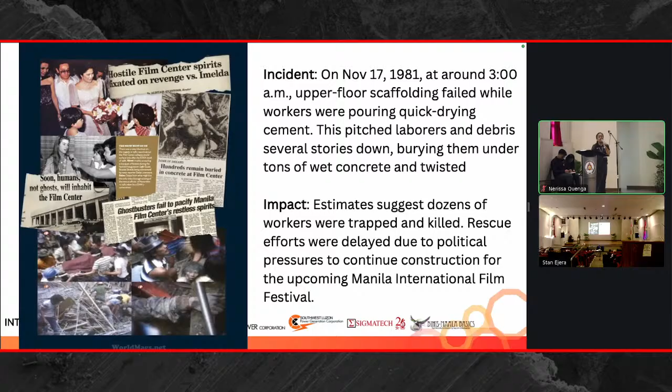The oldest one I have shown here is way back in 1981, and it's happening also in the very place where we are supposed to nurture experts of engineering. So what's the problem? You can see also in the previous slides that the impact of failure of engineered systems and products has an effect in various areas.

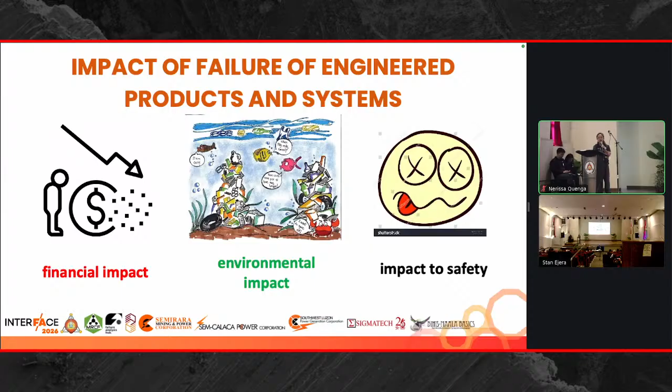Impact to financial losses, impact to environment, and impact to safety. All this should be reason enough for us now to look at this more closely, investigate, ask why, and how we can stop all of this.

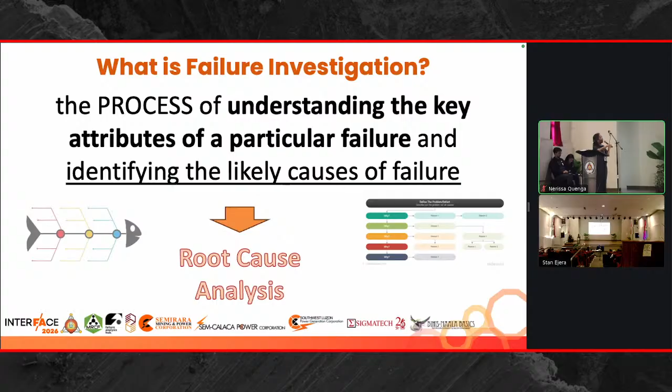Failure investigation is something that has been offered in the department for some years, and we define failure investigation in our courses, in the way we teach our students, as follows: failure investigation is a process of understanding the key attributes of a particular failure and then identifying the likely causes of that failure so those causes can be used to do root cause analysis.

From the root cause analysis, we can move forward to doing failure reporting, analysis, and corrective action system, or FRACAS. Essentially, FRACAS is a cyclic loop that will help us prevent recurrence of failure. FRACAS has seven steps: failure occurrence, failure reporting, failure analysis, root cause identification, corrective action implementation. When one corrective action does not become effective, you go back to reporting or failure analysis, doing root cause analysis, and addressing another root cause that might have been determined, to see if it has been effective. So there's verification of effectiveness, monitoring and tracking. All this cycle gives us a system for preventing recurrence of failure, or better, a cycle for continuous quality improvement of our engineering products, systems, and services.

If we had applied this from 1981 probably, the problems we are experiencing right now might not have existed at all. So that makes us ask, why has this not been applied? Maybe the answer is because many of our engineering disciplines are not yet integrating this into our curriculum or into our ways of teaching students.

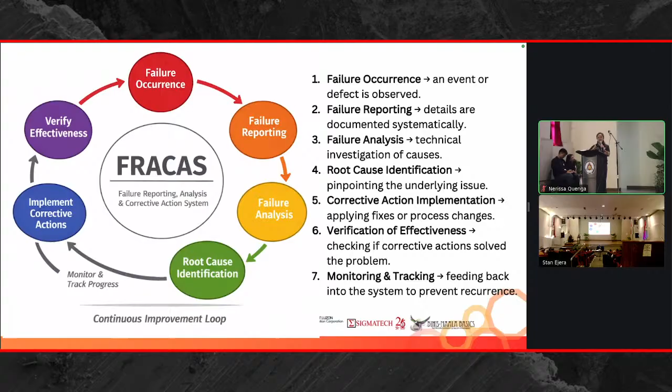So let me proceed. Failure investigation using the FRACAS system has different outputs and different objectives. From an end user perspective, failure investigation can be used to assign responsibility.

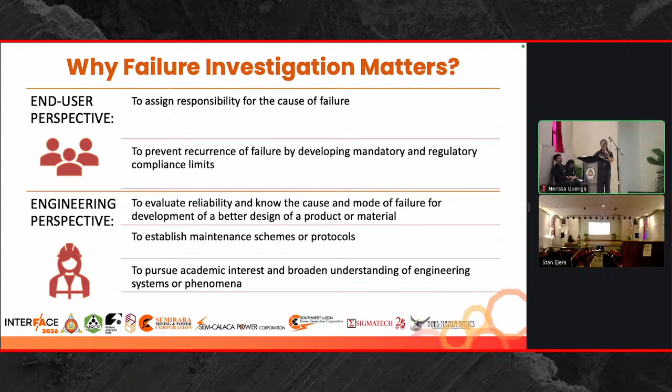Further, from the academic perspective, this failure investigation helps us broaden understanding of engineering systems, procedures, and phenomena and mechanisms of failure that will help us develop new ways of doing things through research and innovation that we do with our students at different levels of academic layers. So whether it is for the public or for the engineering industry, there's a lot of reason why failure investigation needs to be done.

Moving on, in failure investigation, there will be a lot of success when root cause is identified. If you remember the FRACAS loop earlier, there's an important key there, or important element of identifying the root cause. The root cause brings us the corrective action, and the corrective action, of course, prevents recurrence of failure. Now, root cause here means it is the underlying cause. It should be reasonably identified, meaning it can be seen and pinpointed.

And then that pinpointed event, activity, or step can be controlled and fixed. It can now help prevent the recurrence of the failure. If this cannot be controlled, that is not yet the root cause. We need to dig further.

I always tell my students, if we only look at materials, we show the mechanism of failure, but it doesn't tell our end user how to address that and prevent recurrence. How do I address my procedure? Where do I correct steps? How do I control my system? If they can't bring it to that level, that is not yet a complete failure investigation. We may have shown the mechanism, but the failure investigation isn't finished.

Okay, so with that now said, there are different sources of root causes.

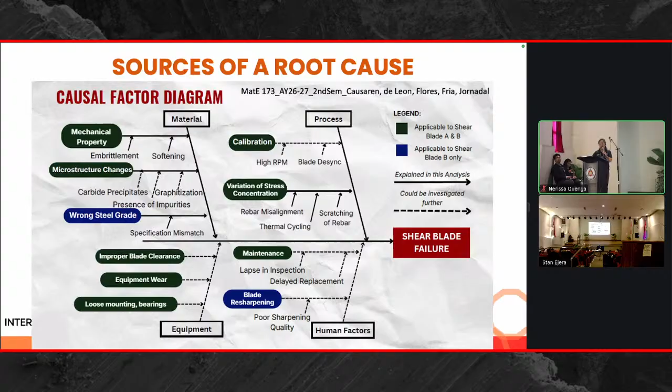What do we mean by latent? Latent means cultural, organizational, rules leading to human causes.

So if we notice, physical is just probably the first step. Then, if we can't find it in physical, then probably it's human error. And if it really is human error, it's probably because there's a bigger problem in the organization. It's like even if you replace that human, the problem could still recur because it's really organizational, systemic.

So we're saying there are different sources of these causes, and the process of investigating from physical to human to latent is what we would like to teach our engineers. In the department, we offer different courses that allow our students to go through the process you saw earlier, from failure reporting to involving corrective actions.

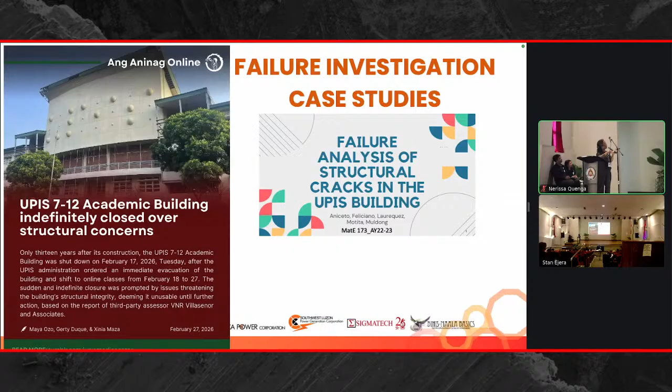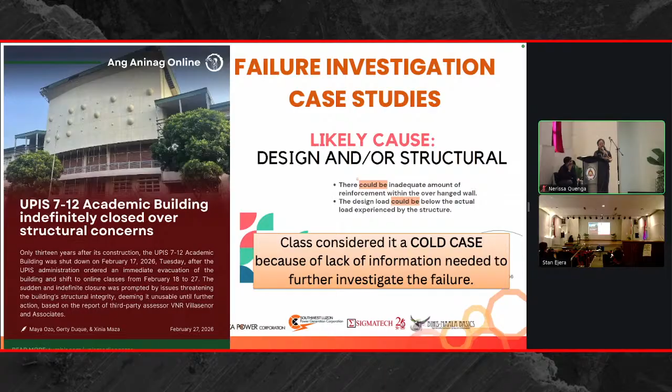Kaya, pagkadulo ng semestre, ang inabot ng estudyante, there could be inadequate amount of reinforcement, or the design load could be below the actual load experienced. This could have been verified further if we had contact with the contractor of this building. However, being students, we had limited access to that contractor, and the system in the university somehow limited us from accessing or contacting them. So from our perspective, when we did this investigation, we had to classify it as a cold case.

So moving forward, going back to this diagram again as our root causes, our experience from the failure analysis exercises of the students, when they enrolled in our courses, sort of became limited because the time was limited. And of course, there is a bigger need for collaboration with our partner companies. That collaboration will require MOA, will require continued, sustained, and documented collaboration. We are not there yet at this time.

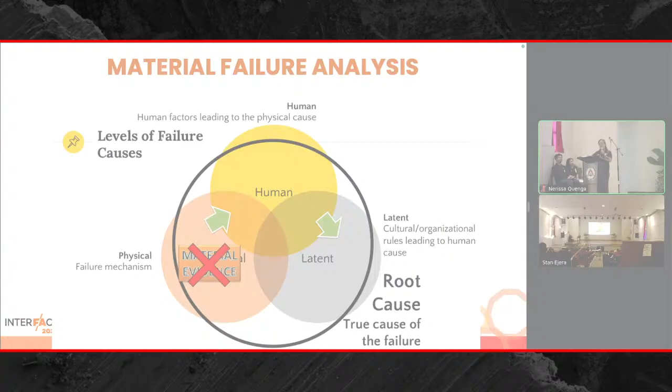Kung hindi naman human, syempre madali itong gawin mo. Kahit pumalya-palya ang mga estudyante sa pag-i-interview, pwede pa rin magawa. Pero kapag ito na yung naging problema, hindi talaga human, but really the organization is having the problem. Kahit palitan mo yung tao, kung ang organization ang problema, mag-o-occur yung failure. Parang dito tayo pwedeng tumingin, di ba?

So as I've said, 1981 pa yung construction issues natin noon, and until now, we are still experiencing that. Baka nandito na po yung problema natin. But we have not been able to investigate on that and build up on that so that we can prove that this is where we need to address issues on.

With that said, I would say failure investigation could actually lead to innovations. Innovation in practices, innovation in operation, innovation in products, in systems. However, for us to realize that, as materials engineer, as metallurgical engineer, we only will be able to provide confidently physical evidence. There is a need to collaborate with other engineers in other fields of discipline. Probably, as I've said earlier, there might be a need to collaborate with social scientists.

Ay, nandito pala sa baba yun. Other scientists and technologists. Kanina nakipagkwentuhan po ako sa PTRI, at ang kwento nila, yung isang sewer, yung nananahi, siya mismo, dahil expert siya sa pananahi, siya mismo yung nakapagtanong at nakapagbigay ng input para ma-identify yung root cause ng problem. They are not engineers, but they are experts in their practice of profession. Thus, there might be a need for us to collaborate with them.

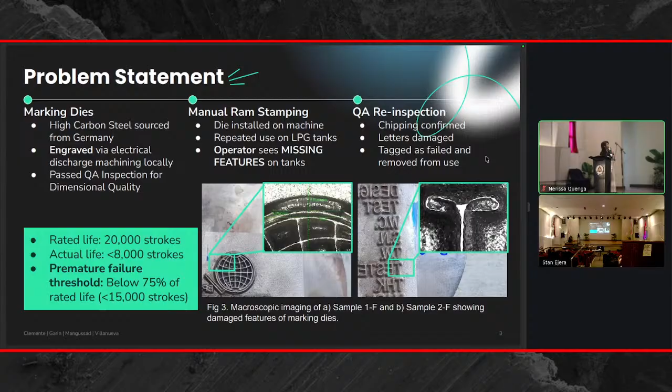Here was the problem encountered by our client. AISI D2 carbon steel was sourced from Germany and locally as well, and it was engraved via electrical discharge machining and then passed quality inspection at our client. These dies are then installed into mechanical press machines where they're repeatedly used on the LPG tanks. Missing features were noticed, and this constituted a premature failure after only about 8,000 strokes instead of the expected 20,000 strokes. This was confirmed by presence of chipping and damaged letters, and these were tagged and later failed and removed from use.

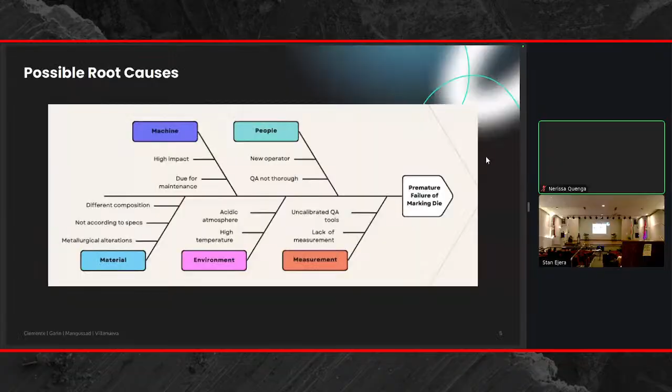So because of that, these were the theoretical causes of degradation and failure that we proposed: the EDM recast layer, improper heat treatment, fatigue failure, and impact overload. Here we can see those integrated in our causal chart, showcasing the life of the AISI D2 as it's prepared by the supplier, heat treated, and as it's engraved and eventually used in the mechanical press operations, where it eventually failed.

Our failure analysis methodology largely constitutes visual inspection, hardness measurement, and later on metallographic analysis. This is the sample code I will be referencing throughout the presentation. For the two failed AISI D2 samples, we have 1F and 2F compared against a control of an unfailed 3NF, and we also did a further comparison with SKD11.

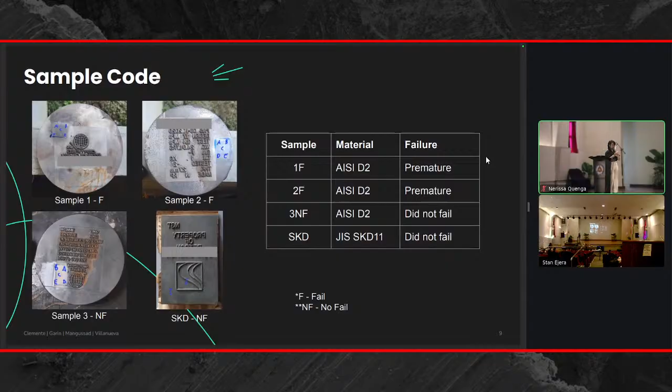Initial macro fractography results showed the following signs of fatigue wear in the samples: chipping, wear, and cracks. Chipping was usually shown at the curved edges. We have oblique impacts showing a brittle failure mode, and wear was found in all samples, but notably higher in concentration for the failed samples.

So wear is inevitable, but if gathered in enough concentration, it can also lead to effects such as the letters not being embedded properly during use. Chipping was only found in one instance here, in the check mark for sample 1F. This is likely due to the stress concentration at this sharp corner.

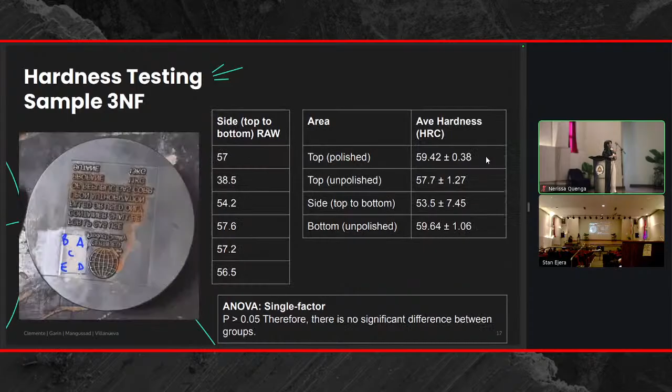So here in the inset bar graph, we can see that samples 1 and 2, the red and blue graphs, have notably lower counts of these alloying elements, and the SKD sample also had a remarkably lower count of vanadium. This was also similar to what we received from the client.

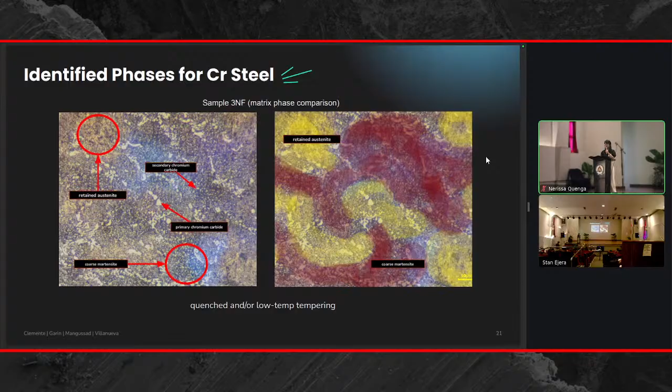And here as well, we have the identified phases for chromium steel. Chromium in AISI D2 has a tendency to form carbides as it's quenched and tempered. Here we see those primary and secondary carbides, and in the matrix we have retained austenite and some formation of coarse martensite. According to literature, this is typical of quenched and/or low temperature tempering samples.

Moving on to discussion, a key point here in our analysis of the metallographic structure is the microstructural evolution of AISI D2 steels as they're tempered. Over time, after quenching and as tempering temperature increases, we see the decrease of retained austenite and an increase of fractions of tempered martensite and coarse carbides, indicated by the precipitation of large angular carbide structures in the grain boundary network. Generally, as in literature, the hardness of AISI D2 steel tends to decrease as tempering temperature increases.

This is because, as we recall, the reason why martensite is hard in the first place is because as it forms, carbon is trapped inside the martensitic structure, which increases hardness.

So tempering reheats that structure and increases the diffusion of carbon, thereby decreasing its hardness in exchange for finer and more ductile tempered martensite. So this was consistent with our findings.

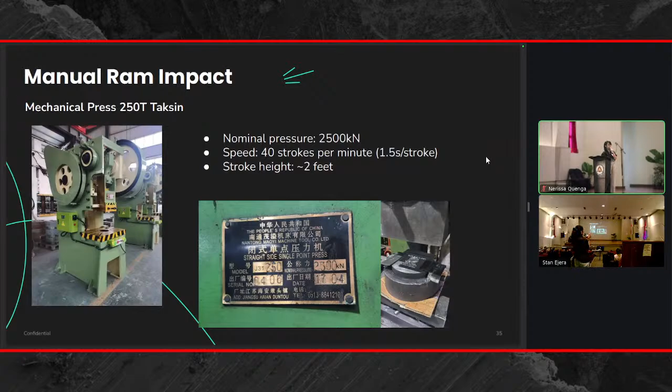So these samples failed under operation of a mechanical press instead of hydraulic press. Essentially what happens here is that the die is loaded up into the mechanical press and then released abruptly. So ito ang nominal pressure and speed that we obtained from interviews with the client. And further emulating it in software, we calculated the theoretical force needed to break the die, which is about 28,000 kilonewtons.

This was based on the lowest hardness value that we measured earlier, which was about 53 for sample 2F. So even then, we saw na parang hindi umabot yung theoretical force to break the die. So for now, theoretically, we can say at least na parang yung manual ram impact, hindi siya yung predominant cause of failure.

What might have further contributed more, however, is the effects of electrical discharge machining, because it should be noted a bit more context that the samples before were engraved by another supplier, and then when we went and asked for further clarification on whether or not they do any post-polishing processes, sabi naman nila hindi.

So an EDM recast layer is essentially this white brittle layer that forms on top of the engraved markings that happens due to resolidification of the material as it's heated during engraving. So the presence of the recast layer tends to induce micro-cracking, and without the post-electropolishing needed to remove these, it can lead further on to cracking and other sorts of wear later on.

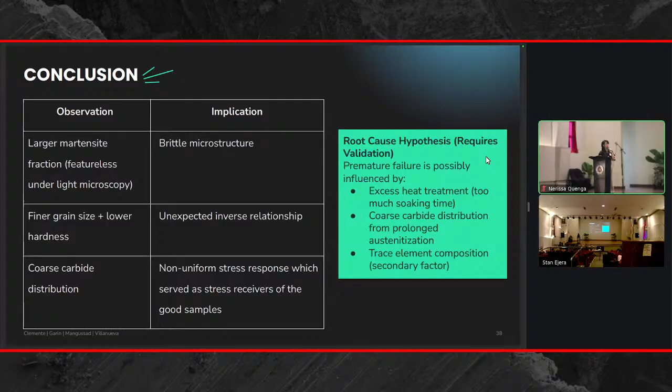So our root cause hypothesis here, requiring further validation, is that premature failure was possibly influenced by: one, excess heat treatment or uneven heat treatment between samples; coarse carbide distribution; and the trace element composition that we gathered. So for further recommendations, it is recommended to further validate the heat treatment parameters, to go through exactly what is being used, and conduct quantitative follow-up studies and other further investigations.

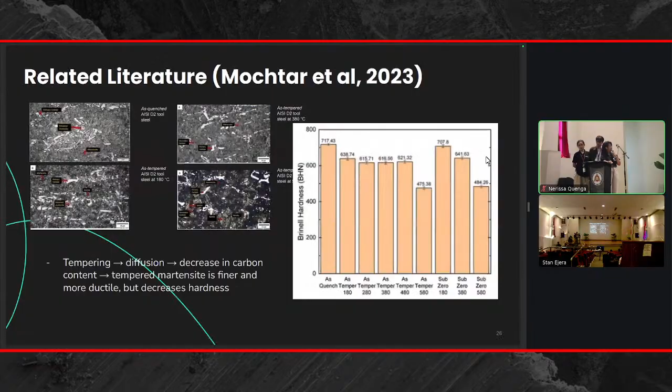So from the fatigue signs, we know that it's fatigue, so it's low loading, and there is a stress concentrator, right? So did you find the stress concentrator?

The stress concentrators, for now, according to what we've seen, are actually the coarse carbides. So wait, let me just go there. This can be better seen here for sample 2.

So here we are, according to comparison with literature, over-tempering in the AISI D2 samples usually leads to the formation of coarse carbides. So this is them. They form angular shapes at the grain boundaries, and because of their structure, these usually serve as stress concentrators as well.

That's why the hardness also decreases, which might have contributed to fatigue wear in the sample.

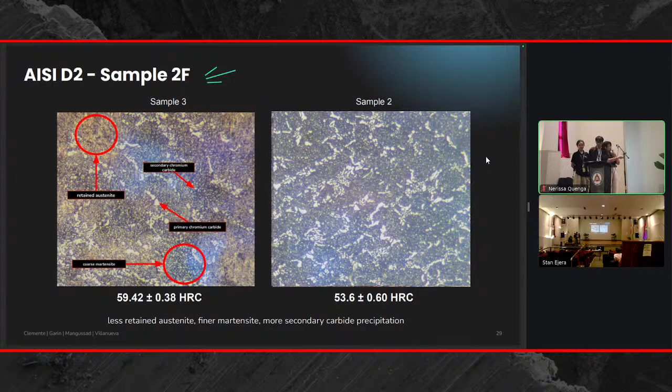Essentially, it's generally over the whole specimen. It's not specific, the fatigue. Yes, because when we check multiple areas, the structure seemed consistent for this sample, at least. Okay, thank you.

One last question from the audience. Just a clarification, in relation to Doc Les's question, you mentioned the possibility of microcracks because of the, what was it again?

The EDM. Yes. Isn't that more likely to be the stress concentrator than the carbides, if there are only specific regions where you're seeing the marks of failure?

And just a clarification, are these images from your test, or are these from somewhere else? Apologies, this is from related literature.

So regarding the microcracking, it's true that it's possible they could have been stress concentrators as well, which contributed to failure. But for our current limitations, the only way we can actually check if there's a recast layer is through SEM, and because we were not able to do that, it's a possibility right now that we further recommend needs to be confirmed and validated.

Just a basic question: were you able to piece together and link the problem, the cause, and the recommended solution to solve the problem based on this study?

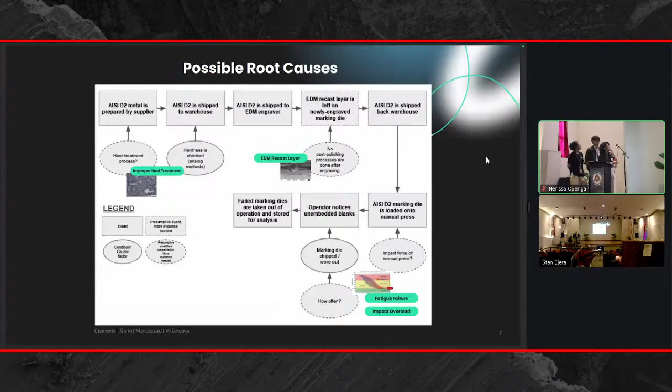So in terms of why this wear could have possibly happened, disregarding other possible factors, we can at least say that there is at least a tangible effect from possible improper heat treatment. We can at least say that there's at least a significant contribution due to the heat treatment.

Because if the heat treatment varies between different samples, that means the hardness isn't controlled, and because the hardness and toughness aren't controlled, their behavior under operation isn't controlled either. So follow-up question, can you go back to the final recommendation?

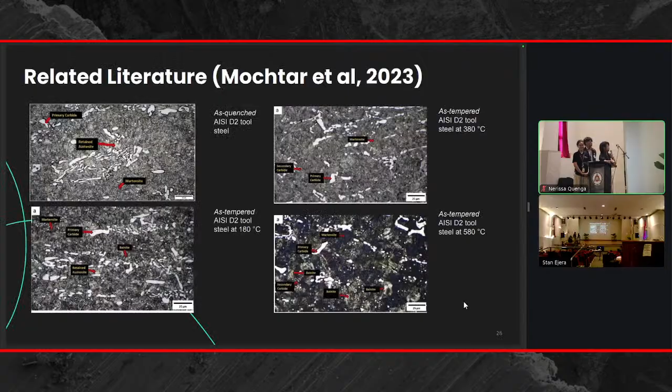Oh yes, right. So you said you have a client on this one, right? And on your recommendation, were they able to, first of all, accept those recommendations, and were they able to implement some of those solutions, and what were the impact of those?

We've already presented these to our client, but that was just really recently, as in last week. So as to whether they'll implement it, it remains to be seen. Okay, thank you.

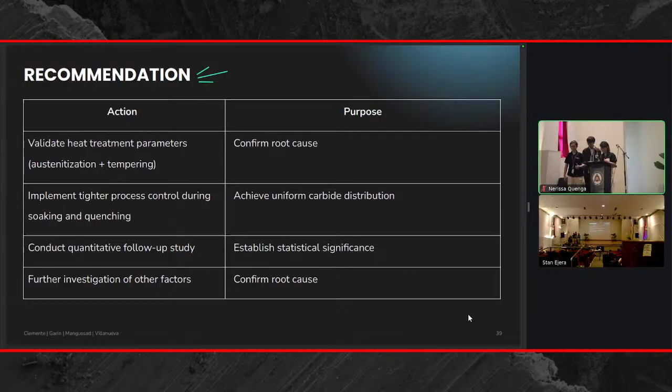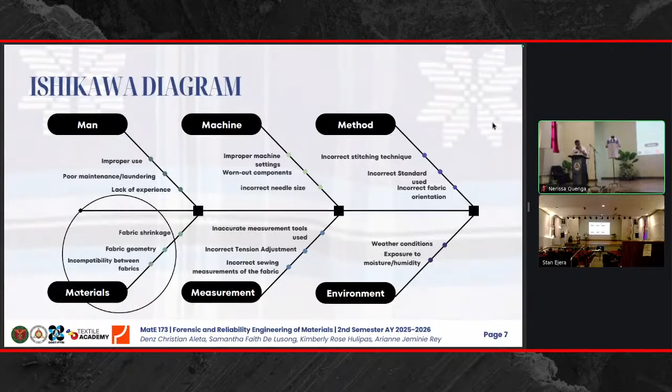While factors like loose stitching or improper use are probable, this study focuses on materials due to project constraints. Consequently, our objectives center on evaluating the material properties to pinpoint possible causes of this failure. But before we head to the study proper, it is important to understand the fabrics used.

First is our patadyong, the hand-woven patadyong, the blue one on this shirt, and the knitted honeycomb fabric, the white one, which are joined in the garment. Patadyong follows a plain weave structure characterized by the crisscross pattern of yarns. Garment construction follows standardized stitch and seam classifications based on ASTM D6193.

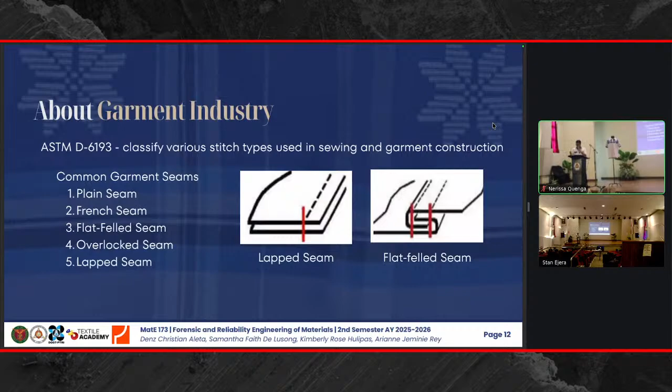This study covers the garment manufacturing process from pattern making to finishing. The two fabrics differ in yarn geometry. Woven fabrics consist of interlacing yarns, while knitted fabrics consist of interlooping yarns. These structural differences are expected to influence their mechanical properties.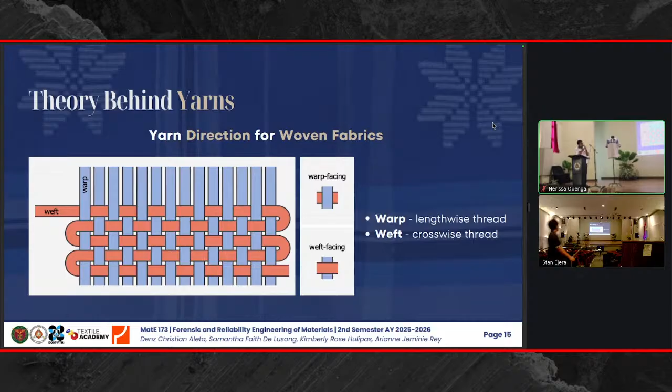For woven fabrics, the yarn directions are warp, the lengthwise thread, and weft, the crosswise or running direction. For weft knitted fabrics, the corresponding directions are wale and course. Why is this important to understand? Because according to textile mechanics, fabric structure may significantly affect overall mechanical behavior.

The client specifically requested that no further destructive testing be performed on the original polo shirt. Therefore, sample replication was conducted. Replicated samples used stitch type 301, also known as the locking stitch, with a stitch density of 10 stitches per inch or SPI, while overlocking was applied for the edge finishing.

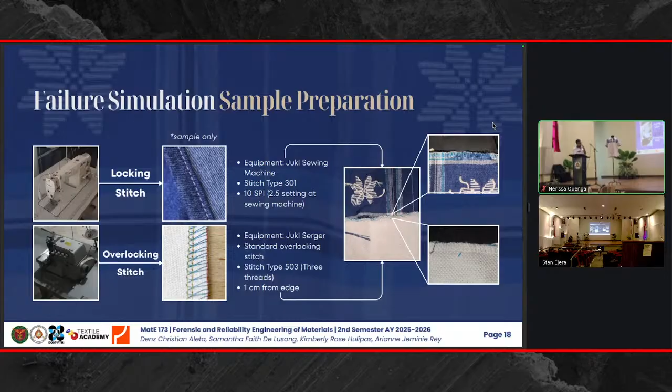Here they are. The replicated samples were designed to closely match the original polo shirt, while complying with relevant standards. The weft direction was followed for woven fabrics, and the course direction for knitted fabrics.

For the methodology, a visual inspection was first conducted as a non-destructive test to assess the severity of the failure. Preliminary testing was then performed on the raw fabrics for characterization and supporting data purposes. Finally, several destructive tests were conducted on replicated samples to simulate the possible causes of failure.

For the visual inspection, it allowed us to measure the seam opening length and the diameter of the front yoke attachment. For microscopy, it provided us the necessary data for sample replication and testing. The garment was found to have 10 SPI with a separate overlocking stitch.

Here it is, if you can zoom in, you can see the white areas. The fabric orientations were identified as weft for the patadyong fabric, and course for the knitted honeycomb fabric.

As a characterization, FTIR analysis was performed to determine the composition of the two fabrics. The first spectrum corresponds to the honeycomb fabric, while the second represents the blue region of the patadyong fabric. The third and fourth spectra were obtained from two different segments of the silver intersection area of the patadyong fabric. All spectra exhibited similar peak patterns, suggesting a common material composition.

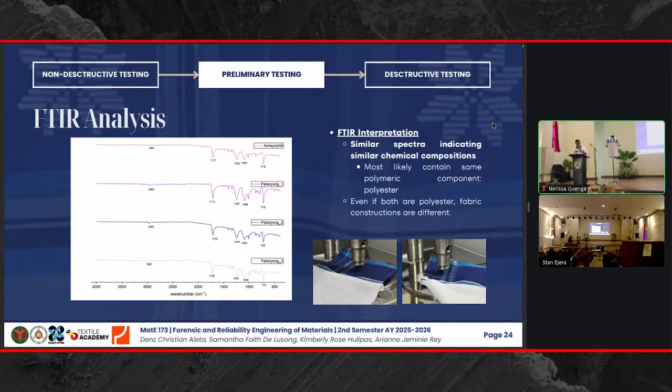So now, as an additional characterization, tensile testing was conducted following ASTM D5035, also known as the strip test method, with specimens conditioned according to ASTM D1776. Five samples from each fabric direction were tested under 1 kilonewton load.

So from here we can play this one. So the results, here they are, our patadyong split. There, it had unraveling. And then here, our knitted fabric, it stretched to its limit.

And then here, in the weft direction, it had failure, rupture. So the results indicate that the warp direction for patadyong is actually stronger than the weft direction. However, it also indicates that it is more rigid, and choice of direction may affect the general garment attachment properties. And the data from this will actually be useful to confirm the data for the destructive tests.

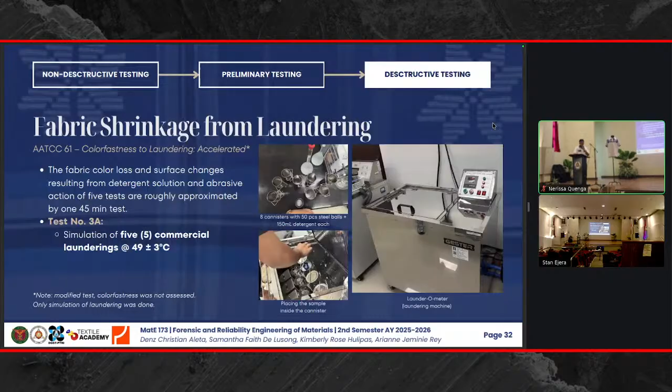So for laundering, this is a destructive test performed on replicated samples, simulating 1 to 2 months of hand washing. Our result indicated a 19.89% dimensional loss, meaning that washing can actually shrink, quote-unquote shrink, our woven fabrics. Well, to be fair, it's just the unraveling part for this one.

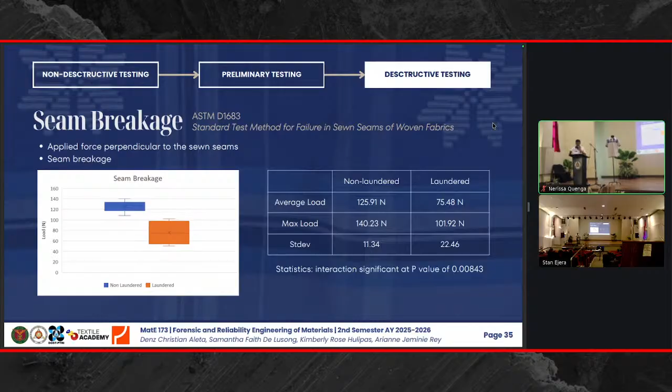And for our confirmatory test, seam breakage, what we found here was that the non-laundered samples actually had a larger or stronger resistance against tensile pulling. So in this context, complete failure indicates separation of seam. Our patadyong unraveled during the pulling, unlike our knitted honeycomb which remained intact.

Next, our destructive test was actually the seam slippage. It's somewhat similar to our seam breakage. However, unlike seam breakage, this one is complete failure, so pulling until our fabrics split.

For seam slippage, we intended to mimic the actual failure in the polo shirt. So what we found out here is that after pulling, threads of patadyong remained at the knitted honeycomb and at its seams.

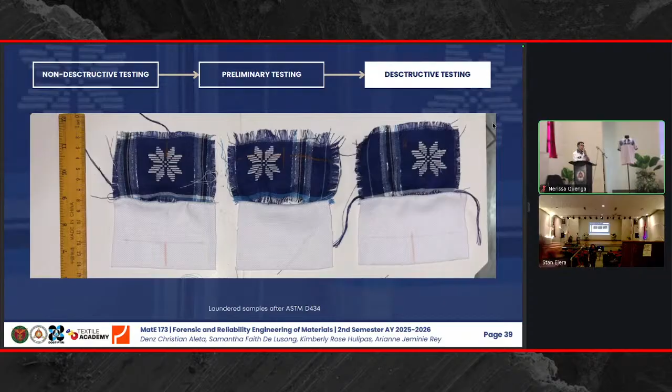So now, going back to our Ishikawa diagram, these are our conclusions per factor. Laundering caused dimensional loss, creating tension that can pull the seam over time. Then our fabric geometry, the two fabrics have differences. And the incompatibility between fabrics, most likely due to the difference between the two fabrics, became a factor in the failure.

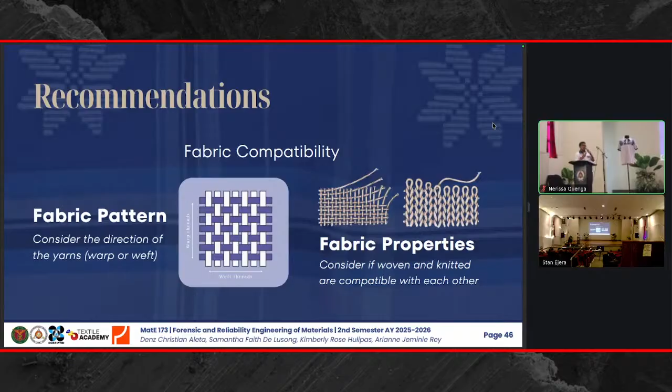And another one, care instructions, because if I'm not mistaken, there are no care instructions for hand-woven fabric garments. So, based on our study, actual laundering may actually affect the overall properties.

And more testing methods, such as chemical analysis, a burn test, to further support our FTIR. And for yarn slippage, fatigue testing, and then simulation.

Although, if I'm not mistaken, the simulation can actually be physical or through FEA. However, for FEA, it's still difficult for fabrics because there might be several computations or extreme measurements needed to accomplish that.

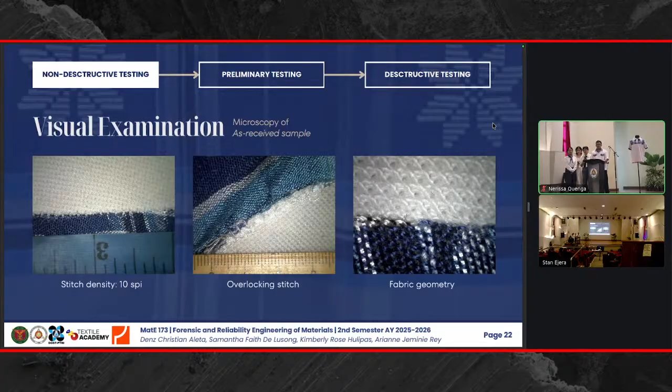from the process that you went through, it seems that you were simulating, right? So therefore, nung nag-apply kayo ng tension, did you consider the amount of load that was actually going to be applied by doing this movement, kunyari? That's now going to be the consideration in terms of what amount of load will be applied to yung material na parang sinimulate niyo para maging simulation siya dun sa actual fabric.

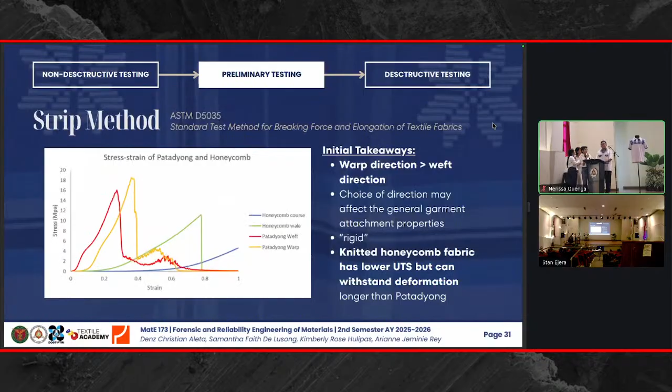So we initially considered po, meaning following the standard, to have a better understanding po on how each fabric would interact, or rather the fabrics would interact to the applied load. And that's why we further suggest po sa recommendations to have a more accurate testing on how the tension is applied, especially po sa fabrics, kasi unlike po sa UTM alone, it's just one direction, but realistically po kasi it could be stretched in multiple areas or in range of motion.

So the stretching could be further better simulated, as discussed nga po ni Denz kanina, na real life simulation. So yung everyday activities will be applied, and how the apparel or the garment rather would react to these various actions around the area of failure. So essentially po yung naging study is nagbigay na po siya ng insight na may chances na mangyari itong ganitong klaseng failure if naging ganito yung construction ng ating garment. Unique siya.

Okay, so first of all, very good job in coming up with very scientific materials analysis with a simple, everyday object. So kudos to you guys. Thank you very much. So balik ka na sa Ishikawa diagram mo.

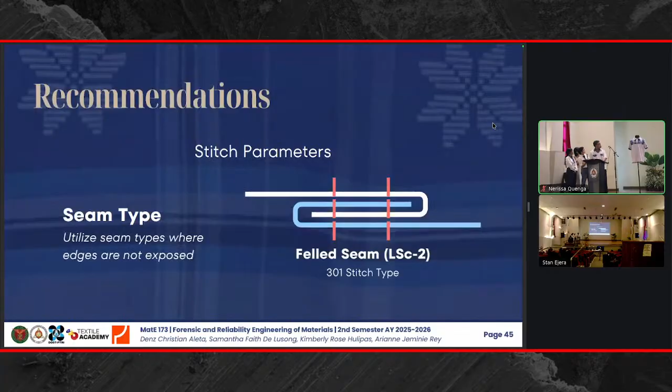And if I remember the number, can you go back to that slide? You're saying there's about 5 out of 100 fallouts? Is that the number, 5 fail out of 100, tama? Yung number ko? Yes. Lumampas. As reported po sa slide. Yeah, okay. But 5 out of 100 is the failure, which means there has to be something abnormal out of that 5. What about the 95? What are they doing right? Have you thought about that under your Ishikawa?

For the other 95, we actually, the 5 out of 100 plus, I think we took this insight from consulting with the client. So we have no access po talaga on what happened to the other 95. Maybe there might be signs of failure in the other 95, like that is not as observable as this unit, but perhaps the 5 units that had the same or similar failure has given them a thought or insight that maybe there's something about the fabrics enough for us to test or to study more into the field.

Siguro to add na lang po, I wish we could recommend din for future research is to also inspect again these 95 successful units, and then compare this with the actual failed, para lang makita po namin yung naging differences sa nagawa ng handloom, if ever, and also the stitching types as well, and basing on their fabric geometry.

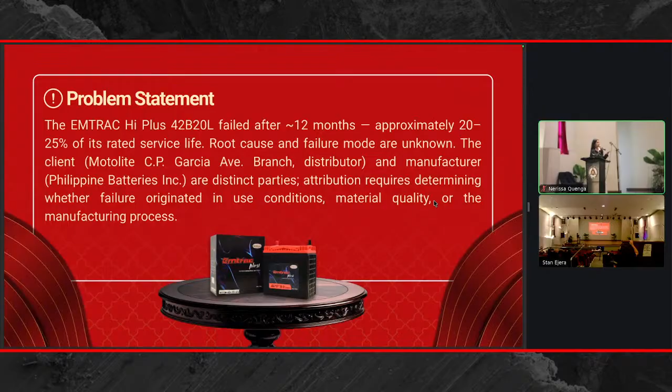For our problem statement, the EMTRAC Hi Plus battery failed after 12 months, approximately 20 to 25% of its rated service life, and the root cause and failure mode are unknown. The client, Motolite at the CP Garcia branch, the distributor, and the manufacturer, Philippine Batteries Incorporation, are distinct parties. Attribution requires determining whether the failure originated in use conditions, material quality, or the manufacturing process.

Our objectives are to characterize the electrochemical and physical state of the failed battery, to identify the failure mechanism through internal examination, to quantify the plate degradation using image-based analysis, to map probable causes via an Ishikawa causal diagram, and to recommend confirmatory tests for root cause determination.

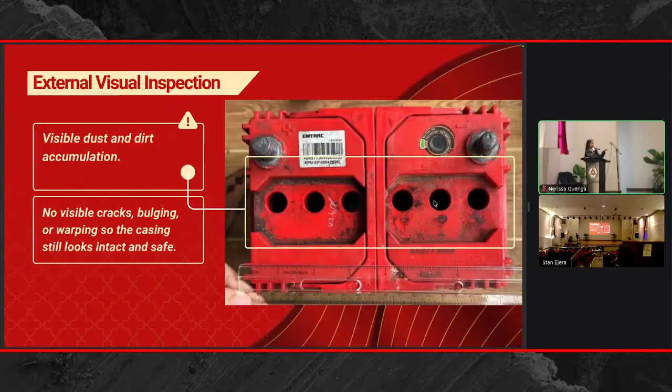For our initial investigation, we looked at the external condition, which showed visible dust and dirt accumulation. There were no cracks, bulging, or warping observed externally, so the battery appeared intact outside. The terminals looked slightly worn due to visible deep scratches. This is just the zoomed-out picture.

For the open circuit voltage and load testing, the OCV on the analog tester showed a 13-volt measurement, dropping to 10.2 volts under applied load. On the digital BT60 tester, it showed 12.70 volts, which falls within the nominal range.

The cold cranking amps measurement showed 144 CCA, compared to the specification sheet value of 335 CCA. The state of health shown in our testing was 33%, confirming significant capacity degradation.

Regarding electrolyte and cell behavior, upon opening the vent caps, we found that 4 out of 6 cells had fully desiccated or dry electrolyte, which is not a good condition since a battery is expected to have visible liquid electrolyte inside the vent caps. This non-uniform cell condition is consistent with advanced sulfation or internal damage, which we will discuss further in the next slide.

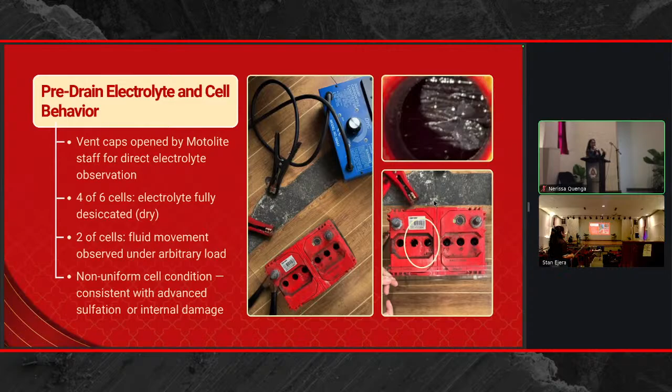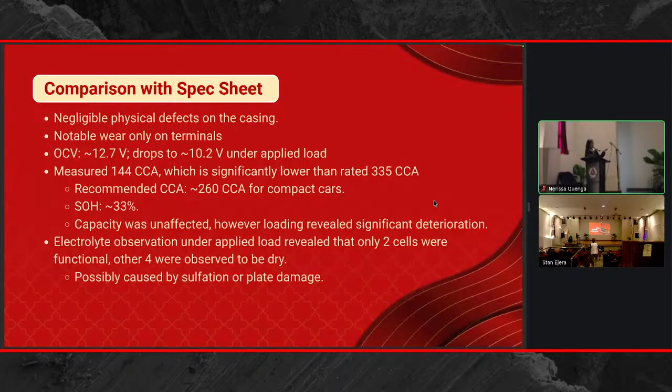For evidence management and chain of custody: the customer complaint was received by Motolite at the CP Garcia branch. The Motolite staff drained the acid and wiped the casing before transport. The specimen was then transported to DLSU, where sectioning and evidence handling were done by the group themselves.

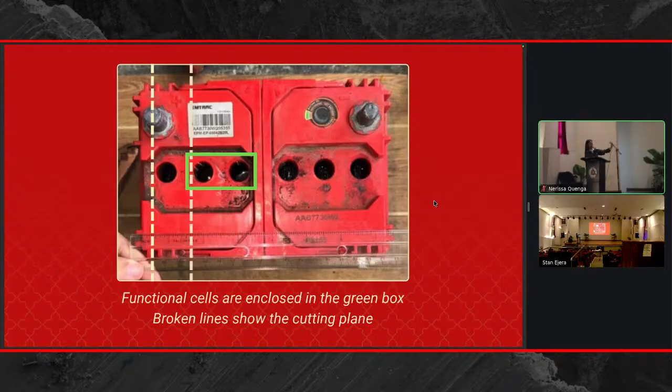For the failed cell analysis, first is sulfation. We found light gray deposits concentrated on the convex outward bulge of the plate, and the visual appearance was consistent with lead sulfate.

Next is plate deformation and buckling, where the plates curved and twisted, with warping collocated with deposit concentration on the convex region. Deformation was heterogeneous across the plates within the same cell. As mentioned earlier, there are 6 cells, and each cell has 5 grids. Across those 5 grids, the buckling varied, which is why we say the deformation is heterogeneous.

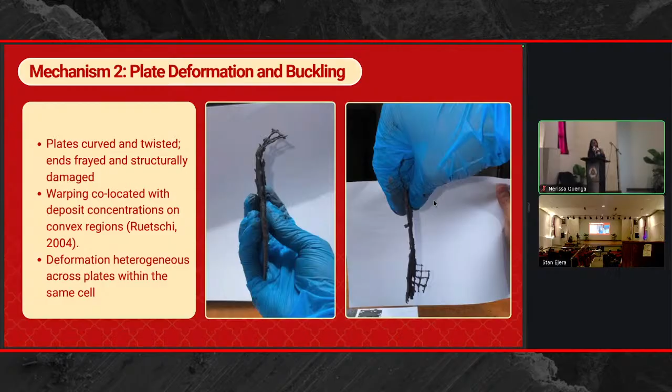Next is grid degradation and active material shedding. We found that the grid was degrading and some active material shed off, which was seen depositing below the battery.

Next is sludge accumulation. Gray, block-like sludge was confirmed at the base of the failed cell, consistent with shed active material, and its volume substantially exceeds that of the working cell.

Next is separator cracking. Here on the left is the working cell, and on the right is the separator of the failed cell. You can see the visible cracks in it.

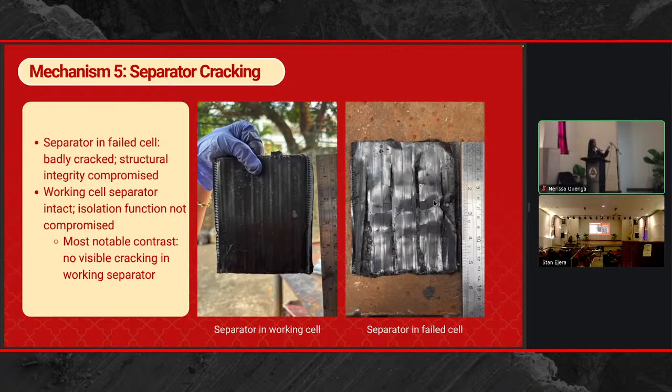To summarize the physical evidence: plate warping, active material shedding, sludge accumulation, and separator cracking in the failed cell are all consistent with significant electrochemical and structural degradation, plus the gray deposits consistent with sulfation, though this still awaits chemical confirmation.

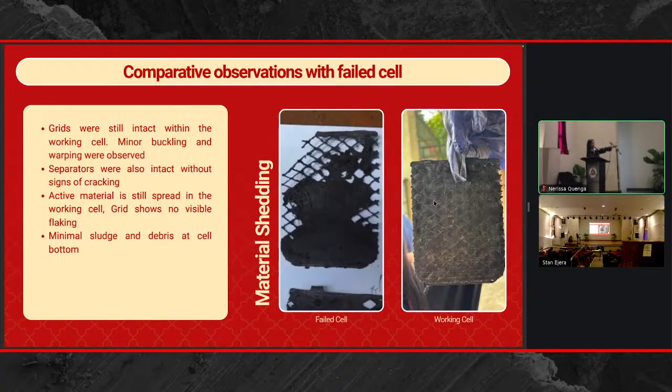This shows the buckling between the failed cell and the working cell, plus the separator cracking - here's the failed cell, then the working cell. Next is the sludge build-up between the two.

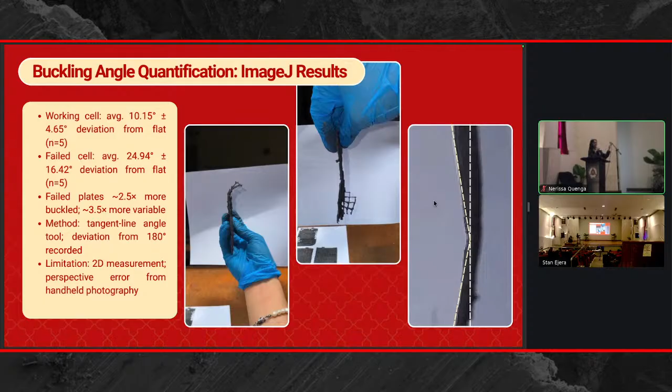For our quantitative results using ImageJ: for buckling angle quantification, our method was the tangent line angle tool, with deviation from 180 degrees recorded. The working cell had a 10.15 degree deviation from flat, while the failed cell had a 24.94 degree deviation. The limitation of this measurement is perspective error from handheld photography, and it's only 2D. Next is the graph showing the difference between the two regarding buckling angle quantification.

Next is the active material loss quantification, or percent area removed. Here's the working cell on the left, and the failed cell on the right, measured using ImageJ. The working cell showed 5.01% area removed, while the failed cell showed 8.63% area removed.

The failed cell shows 1.7 times more loss on average, and we also found a high standard deviation in the failed group, so degradation is not uniform across the plates. The limitation here is the single baseline plate - shadows may cause an underestimate of the removal.

For our recommended confirmatory test for the gray deposit, it's SEM/EDS, to confirm the required sulfate identity.

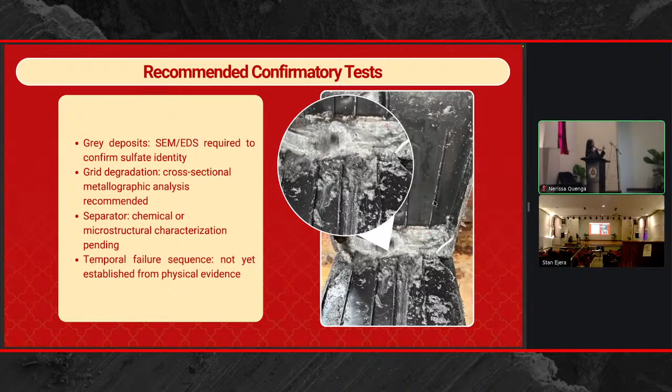Grid degradation is analyzed through cross-sectional metallographic analysis, while the separator involves chemical or microstructure characterization. The temporal failure sequence is not yet established from the physical evidence.

So next, summary of our findings. Yes, we obtained the electrochemical and physical state of the battery, then identified the failure mechanism through internal examination. For our major failure mechanisms, the group assumes overheating due to corrosion, short circuits, and overcharging, which dries up the electrolyte. Deep discharge cycles may cause active material to shed, with repeated expansion and contraction of the plates.

Next is our quantification using Image J basis, and mapping the probable cause. Based on the chemical analysis of the battery, significant degradation was observed as measured in electrical performance. In addition, there is a difference between the degradation of working and failed cells. Therefore, the failures are most likely attributed to operational and usage-related factors rather than inherent manufacturing defects.

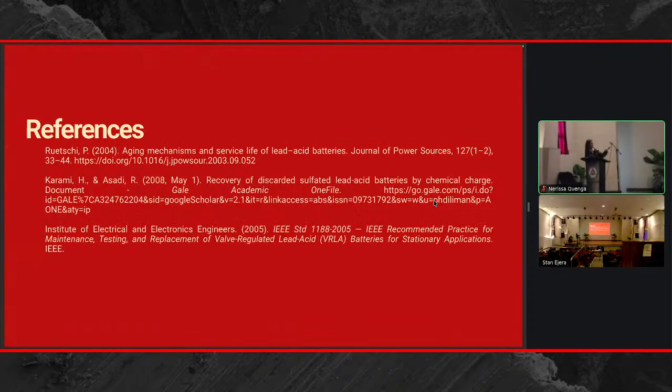And this is our recommendation again for confirmatory testing for the root cause determination. So that's it for our presentation. Thank you. Your group mates may accompany you on stage for the Q&A.

Hello, good afternoon. Is that correct, Doc? This is a lead-acid battery, right? Yes po, lead battery, no? So I'm asking this question because I used to work in Motolite, no? And...

Our primary method when analyzing failed batteries is metallography, no? You look at the grids, look at what the internal structures are, and make conclusions from there. So I'm just curious, I didn't see any metallography. Is there a particular reason why you didn't include it?

Upon consultation, we also consulted with Motolite. We also work at Motolite. Actually, when it comes to metallography analysis, nothing was mentioned to us. And if we consider it, the span we had to do the failure analysis was only one SEM. What our group achieved was only to quantify the image. So we just put it in the recommendations, which is that we acknowledge the need for metallography analysis for that.

Well, I have a similar question to the previous group, but I think you were able to tie together the causes and the data, and come up with a suitable recommendation as well, no? If I go back to your Ishikawa diagram, it seems like you pinpointed mainly material issues as the culprit of the failures, right? Were you able to dive deep into the procedural aspect? For instance, maybe the battery was simply overused, causing it to degrade over time.

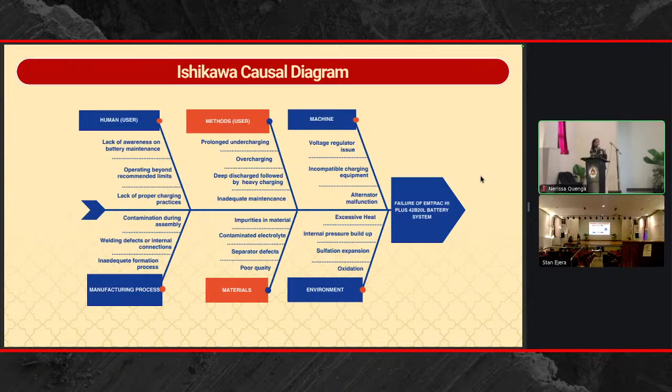Actually, in our conclusion, the conclusion we made is that the failure is mostly attributed to operational and usage-related factors, not so much on... so it's more a conclusion based on customer use. Right, yes okay.

So are you saying that if I were the vendor of this battery, can I assume that it's a user issue rather than a manufacturing defect? For that, I would say it's not 100% sure. That's why we recommend confirmatory testing. Because if you really look at the battery, it's very complicated since it has many materials to consider. So I would say I'm not 100% confident about what we're saying. But based on what we discussed, most of the failures we found are what we would attribute to usage.

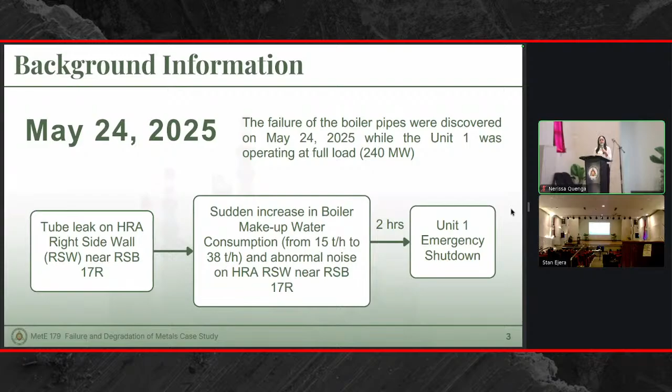Moving on to our sample overview, we have 3 failed samples, named sample 1, 2, and 3 for our investigation. All these tubes are in the hot reheat area, near a rotary soot blower. These tubes do not contain the same steam, but are just located in one place.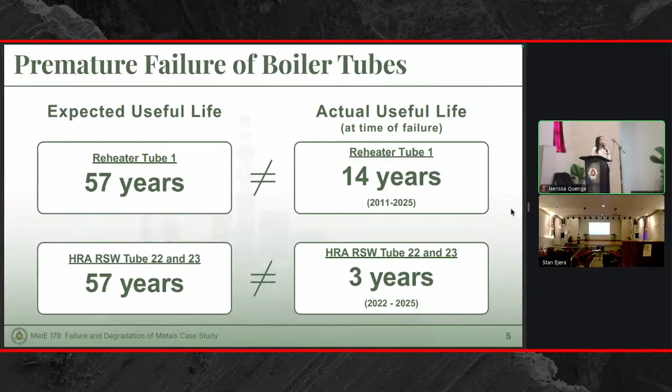All these tubes are expected to have a useful life of 57 years. However, sample 1, or tube 1, failed after 14 years, and samples 2 and 3, or tubes 22 and 23, failed after 3 years. Thus, we are conducting a failure investigation because these tubes experienced premature failure. Moreover, the emergency shutdown caused by the failure of these tubes led to financial losses and safety hazards for the company.

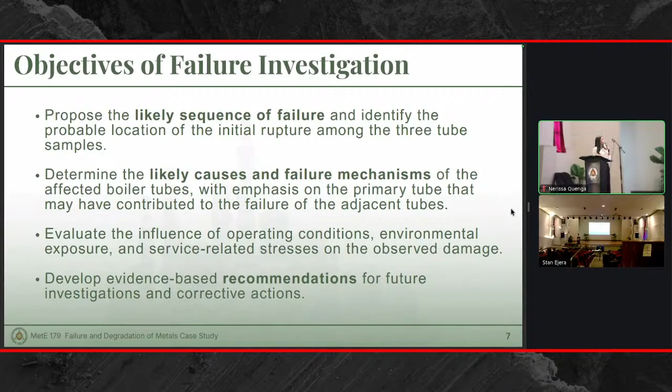We have 4 main objectives for our failure investigation: to propose the likely sequence of failure, to determine the likely causes and failure mechanisms, to evaluate the influence of some factors on the observed damage, and to develop evidence-based recommendations.

Upon closer inspection, we can see that sample 3 has two smaller holes, a pinhole rupture and a smaller elongated rupture above, and one big hole. Sample 2 had one rupture, and sample 1 had one rupture as well.

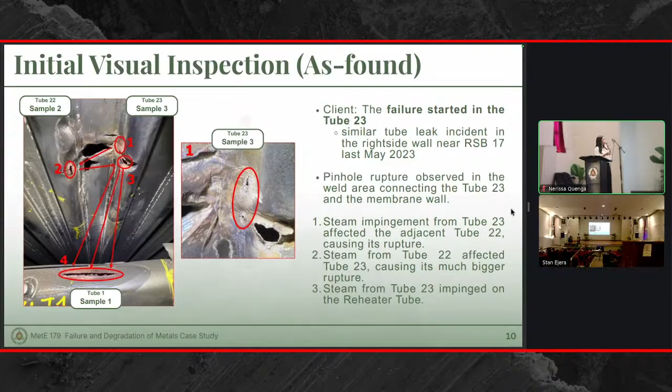The client was also able to provide an initial report on the sequence of events for the failure. From the report, the failure started from sample 3, from the pinhole rupture, which caused steam to impinge on sample 2. This then caused steam impingement again onto sample 3, causing the bigger rupture to occur. The steam impingement from sample 3 then impinged on sample 1, which caused its failure.

Upon closer look, the membrane wall between tube 22 and tube 23 exhibited multiple perforations, which gradually became smaller as it approached sample 3. This is evidence of a directional progression of damage from tube 22 towards tube 23. We can also notice some discoloration on both sample 2 and sample 3.

However, for sample 3, the discoloration is mainly yellow, and for sample 2, the discoloration includes yellow, dark yellow, and brown. These are indicative of heat tints or burn marks, which may be caused by longer exposure to high temperature steam, which is further indication that the large rupture in tube 23 is caused by tube 22.

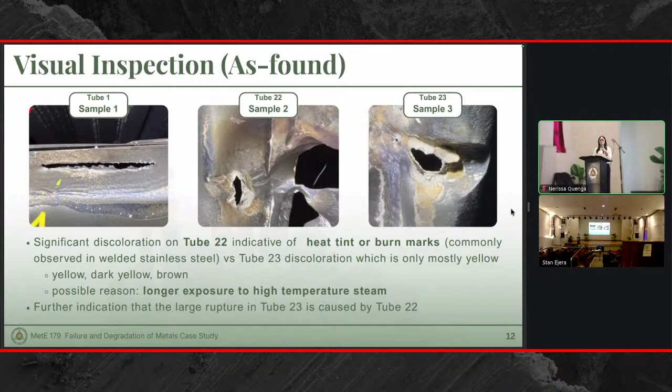Lastly, we conducted dye penetrant tests to determine if there are any defects noticeable, and the red dots that we see are evidence of porosity. Porosity is a common weld discontinuity caused by the entrapment of gases during weld metal solidification. So from these evidences, we can suggest that the initial failure of tube 23 started from weld defects.

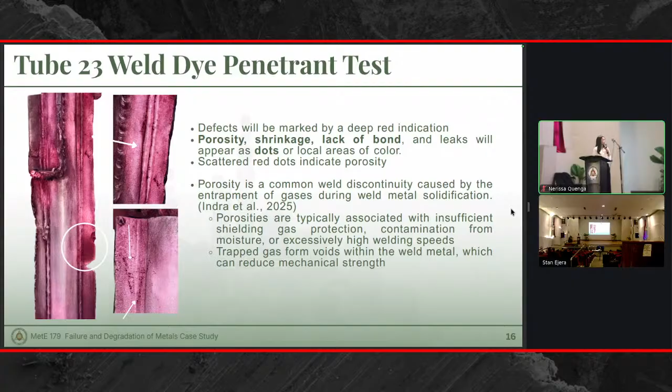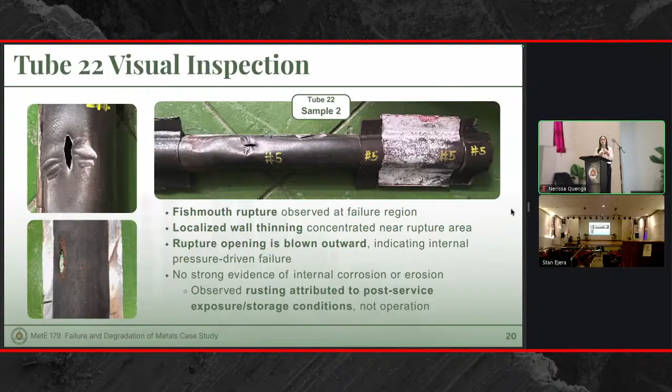Moving on, we also conducted investigation on tube 22, and as you can see from visual inspection, it had a fish mouth rupture, and there was severe localized wall thinning around the ruptured area. These are consistent with mechanisms of short-term overheating, and there is no strong evidence of internal corrosion or erosion, which is consistent with the as-found conditions of the sample, wherein they did not observe any corrosion products present.

We then conducted sectioning, and those labeled with 1s are parts where the failure occurred, and those labeled with 2 are the parts where there is no failure occurrence. We were able to conduct dimensional analysis after sectioning, and we can see that the thinning was highly localized near the rupture area, which is consistent with short-term overheating failure mechanism.

So the average tube thickness is 5.11 millimeters. However, for 2A1, 2B1, and 2C1, we can see that it was reduced to 4, 3.5, and 2.9 millimeters.

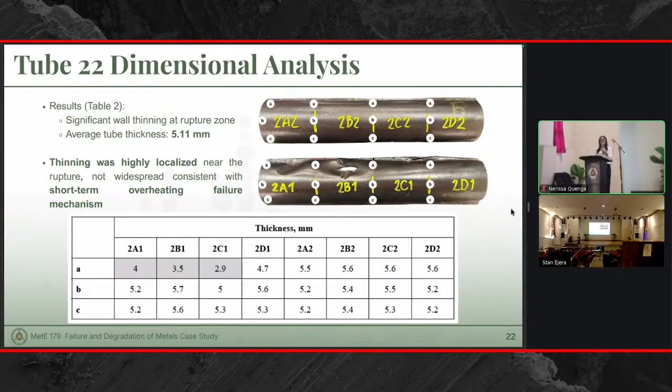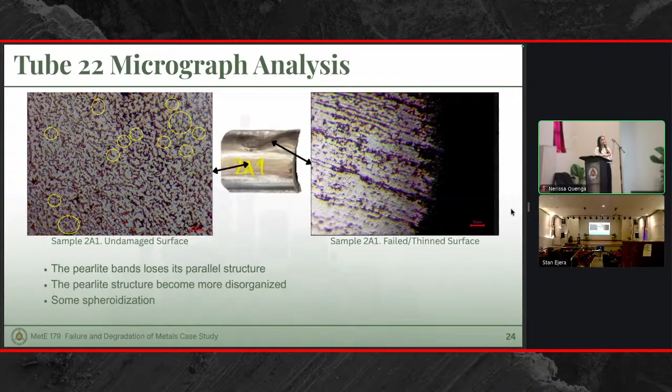And then the area with localized thinning, the photo is reversed. So on the left is the failed or thin surface, and on the right is the undamaged surface. As you can see, the circled areas show some spheroidization, and the pearlite bands became more disorganized or degraded. These are signs of thermal degradation possibly caused by the steam impingement from tube 23.

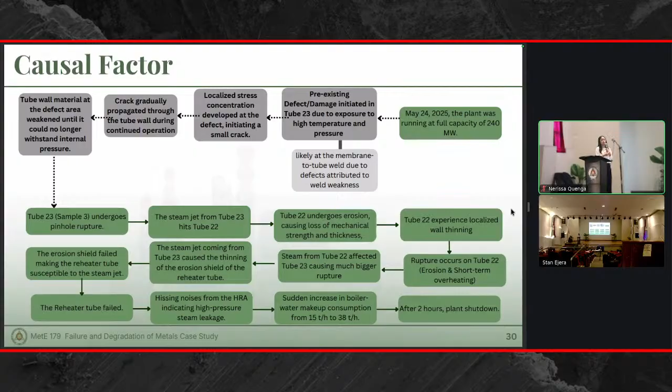So for our conclusion, the weld defect is what initiated the failure, which we observed in tube 23, and tube 23 then affected tube 22, and so on. That is all, thank you.

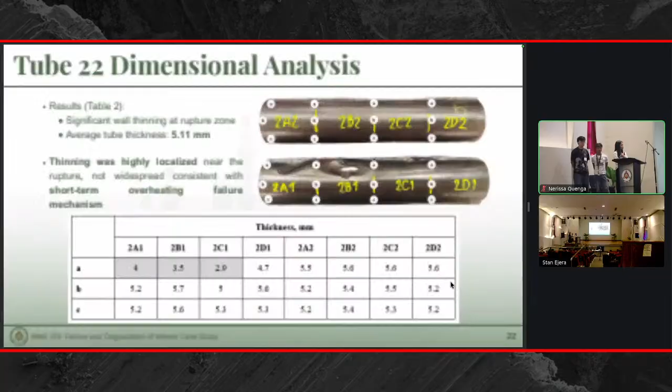So for sure there's going to be something that will change as a result of this failure, right? They would probably enhance that. Second, linked to that question: when you go back to the weld area in particular, were you able to find any mechanical anomaly other than the material anomaly you've seen here in the welding?

For instance, baka may something that's touching or interfering with that, one level down. When you mention weld defect, questionable na lahat ng welding mo sa buong piping. So you have to be very careful in pinpointing. Once you say weld defect, everything is in question. You have to go one level down - was it really an abnormal procedure, or something else causing that effect? That's a recommendation moving forward, especially in an operation like this where time is of the essence. The frequency of inspection - it takes a year before you can really inspect the whole pipeline.

Last comment, not a question, more of a suggestion. I think the data is very good and how you told the story in your paper. There's a possibility you could publish this in some conference or publication related to FA. If you would like, it would be good to pursue it, because it would be a shame to waste the data. The data you collected is good, the interpretation is good, and your root cause analysis too. So I would suggest pursuing a publication, kung sakali. It would be great for your graduation to have publications.